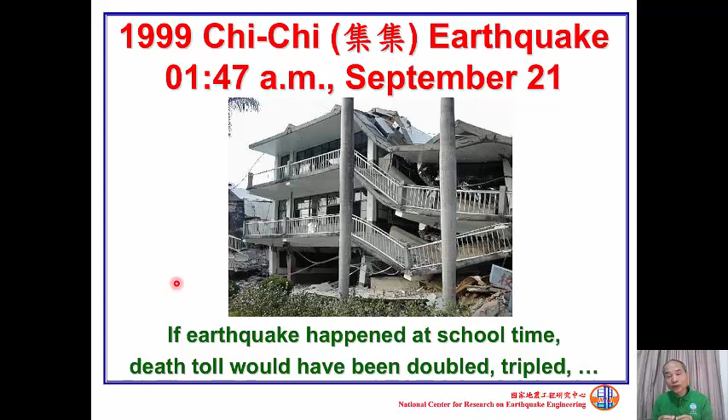This is a picture taken after the 1999 Chi-Chi earthquake. A school building completely collapsed. We were so lucky. The earthquake happened at midnight. No students were there. If the earthquake had happened during school hours, the death toll would have been double or triple. Therefore, seismic deficiency was common for school buildings in Taiwan at that time, but not now. Seismic upgrading of school buildings was a stringent issue at that time, but not now.

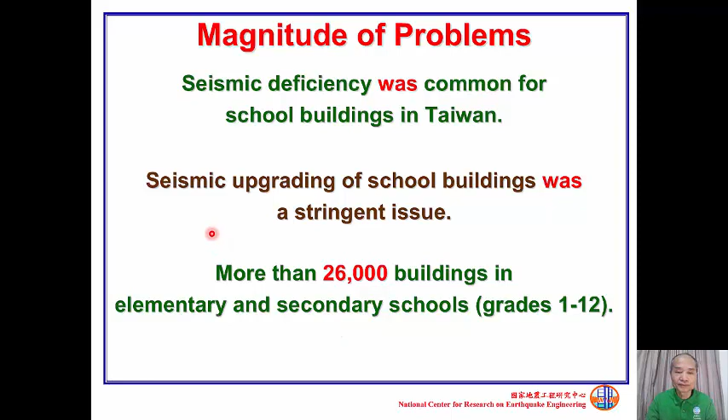When facing the problem, we would like to know the volume of the problem. There are more than 26,000 school buildings in elementary and secondary schools from grade 1 to grade 12. In collaboration with the Ministry of Education, we proposed a strategy for upgrading school buildings. There are several stages here. From the comprehensive survey, we know the total number of school buildings in Taiwan, so that we know the volume of the problem.

Buildings built after 1999 were excluded from this program because we believe their performance is much better, so the total number of school buildings involved in this program is reduced through the comprehensive survey. In the second stage, preliminary evaluation, we have the seismic index, IS, of the school building. Buildings with IS greater than 80, because the performance is okay at this moment, were excluded from the program. Therefore, the number of school buildings involved is further reduced through preliminary evaluation.

The third stage is detailed evaluation. From detailed evaluation, we have the CDR of the building. CDR is capacity to demand ratio. A building with CDR greater than 1 means that the seismic performance is okay at this moment, so they were excluded from the program. Therefore, the number of school buildings involved is further reduced through detailed evaluation. If the CDR is less than 1, the building moves to the next stage, retrofit design and retrofit construction. In the stages of detailed evaluation and retrofit design, peer review is necessary. And in the stage of construction, inspection by professional engineers is necessary.

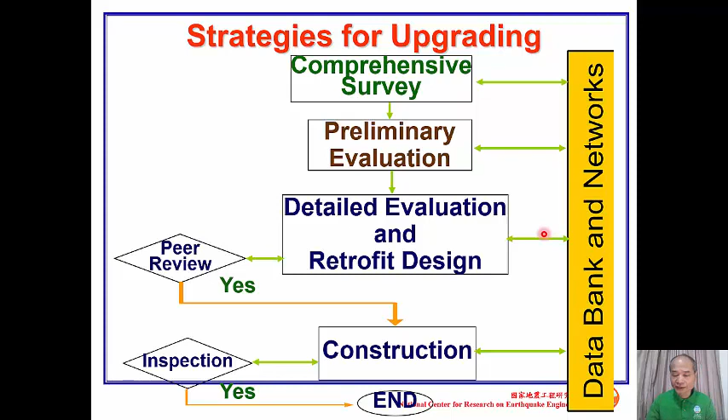The results from all the stages are submitted to a databank through the network, so that we have all the information of all buildings. From the comprehensive survey, buildings built after 1999 were excluded. From preliminary evaluation, buildings with IS greater than 80 were excluded. From detailed evaluation, buildings with CDR larger than 1 were also excluded. Therefore, big fishes were screened out through the process. Only the smallest fishes are left, so that we can handle the weakest buildings first. Through this screening process, the volume of the problem is reduced stage by stage.

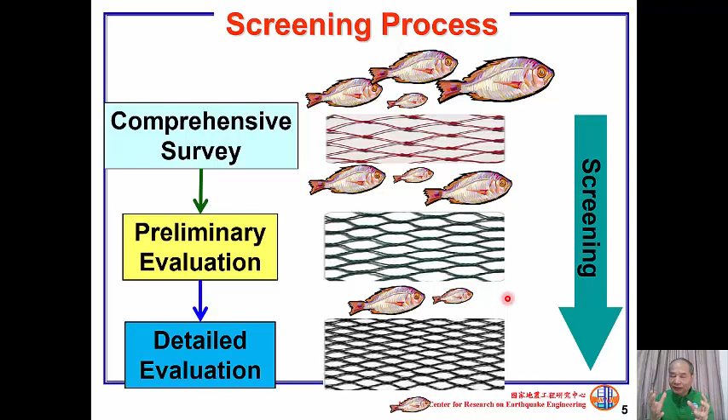Even though the technology of upgrading school buildings is ready, it's very difficult to strive for budget. In 2008, we had a great chance. In response to the 2008 financial tsunami, the government allocated 558 billion NT dollars to stimulate the economy, in which 18.3 billion New Taiwan dollars went to seismic upgrading of school buildings in elementary and secondary schools. It was expected that thousands of school buildings would go through the process of preliminary evaluation, detailed evaluation, retrofit design, and retrofit construction. 1,500 school buildings were expected to be retrofitted in 4 years.

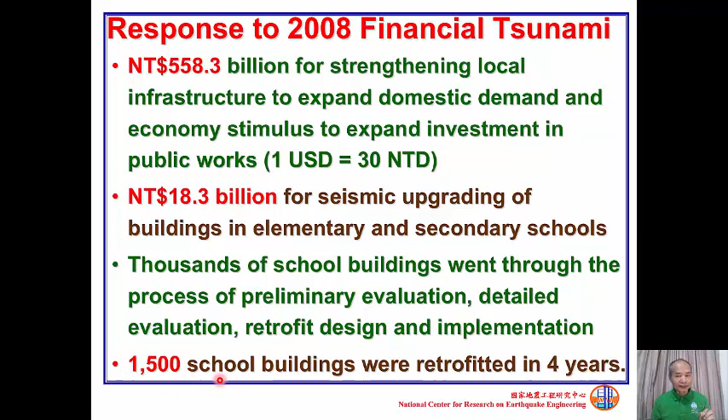In the years between 2009 and 2012, we have a budget of $19.2 billion to have 6,000 school buildings in preliminary evaluation, 3.8 thousand school buildings in detailed evaluation, 1.5 thousand for retrofit design and retrofit implementation. With a good beginning, it is half done. Therefore, more budget followed.

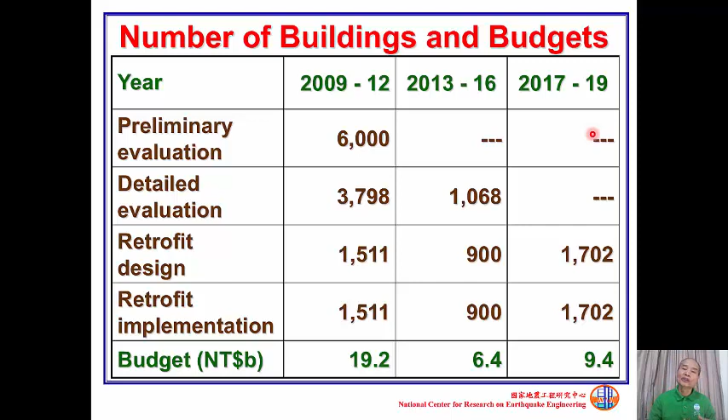In the second stage, from 2013 to 2016, we have a budget of 6.4 billion NT dollars. In the stage 2017 to 2019, we have a budget of 9.4 billion Taiwan dollars. And we hope that by 2019, all the buildings will be completed.

And is retrofit effective? In 2010, we have a verification. In 2010, there's an earthquake called the Jiaxian earthquake, just 1 year after the program was launched. There are 14 buildings in 9 schools that were damaged, and no retrofit measure had been taken at that time yet.

Is seismic retrofit effective? In 2010, we faced the Jiaxian earthquake. Among buildings without retrofit, 14 buildings in 9 schools were damaged. In 2010, the program had launched just 1 year, so a limited number of school buildings had already been retrofitted. This is one of the buildings without retrofit. It has been evaluated and was found to be insufficient in seismic performance. It is on the waiting list to be retrofitted, but by that time it had not been retrofitted yet.

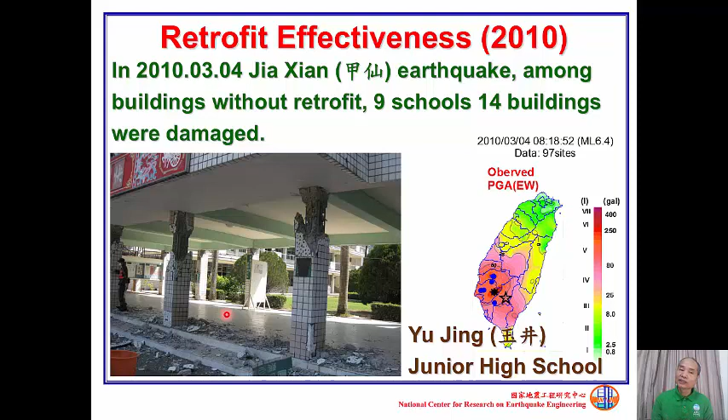About 1 kilometer away from this building, there's another school called Yujing Vocational School. This is the building, and it has already been retrofitted by reinforced concrete wall, and no damage. Therefore, among the buildings with retrofit, no damage was observed in the 2010 Jiaxian earthquake.

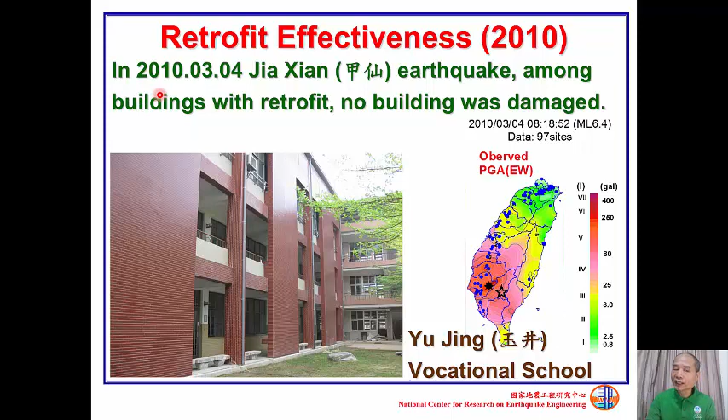In 2016, 7 years after the program was launched, there's the Meinong earthquake in Tainan City. 151 buildings evaluated to be qualified; only 1 building damaged because the ground shaking intensity is higher than the design one. 58 buildings retrofitted, and these are high-risk buildings, and no damage was observed. 85 buildings without retrofit, and these buildings are of low risk. 18 buildings damaged, but no collapse.

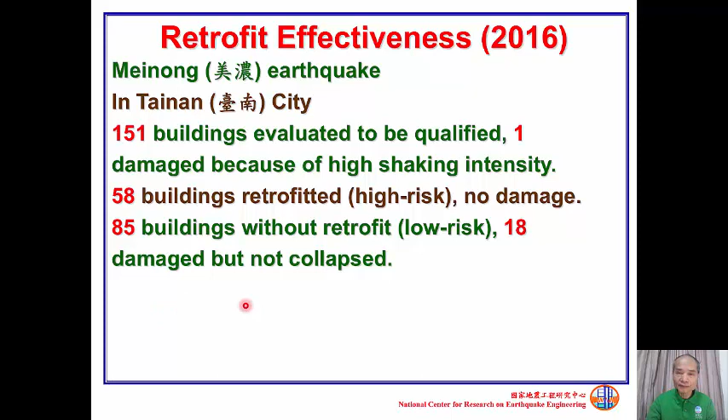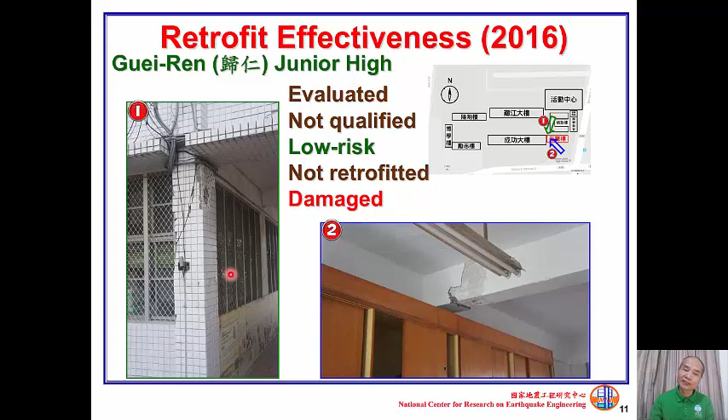Here's an example. In Guei-Ren Junior High School, there are several buildings on this campus. This is Guanghua building. It has already been evaluated to be not qualified, and it is a low-risk building, and it has not been retrofitted yet. It was damaged, but the damage is not that serious; the damage state is considered moderate. Another 2 buildings, Yangming building and Lizhi building, were evaluated not qualified and retrofitted. No damage was observed.

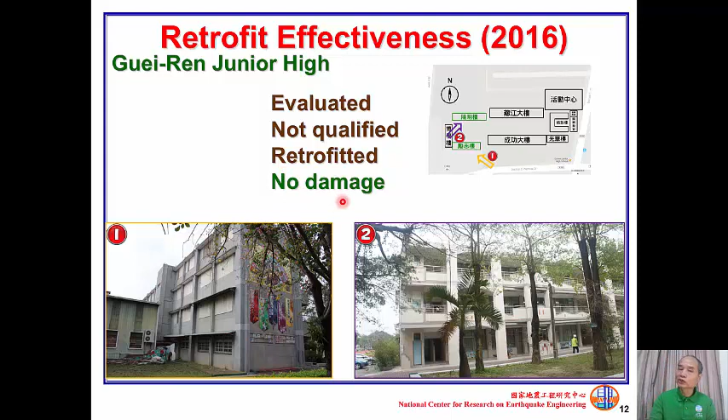There are 3 most common retrofit methods in Taiwan. One is reinforced concrete jacketing. In reinforced concrete jacketing, we make the cross-section of the column much larger. This is the column with no retrofit. This is the column with retrofit. It can be observed that the cross-section of the column with retrofit is much larger.

Another method is adding wing walls to the sides of the column along the direction we are going to upgrade. This is the column with no retrofit. This is the column with retrofit by adding 2 wing walls to both sides of the column.

The third method is adding shear wall. This is the frame, the span with no retrofit. And this is the frame with retrofit. Originally, this frame is similar to the one next to it, and the window is removed and shear wall is infilled into the beam-column frame. The common characteristic of these 3 methods is to make the vertical members stronger and bigger so that the school building can be prevented from collapsing.

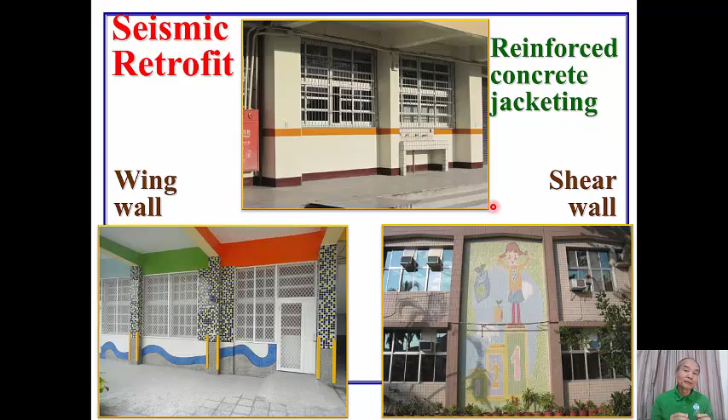This is the first stage, comprehensive survey. It was conducted by students of civil engineering. It cost millions of Taiwan dollars. And from the comprehensive survey, we know the total number of school buildings in Taiwan, so that we have some idea about the volume of the problem.

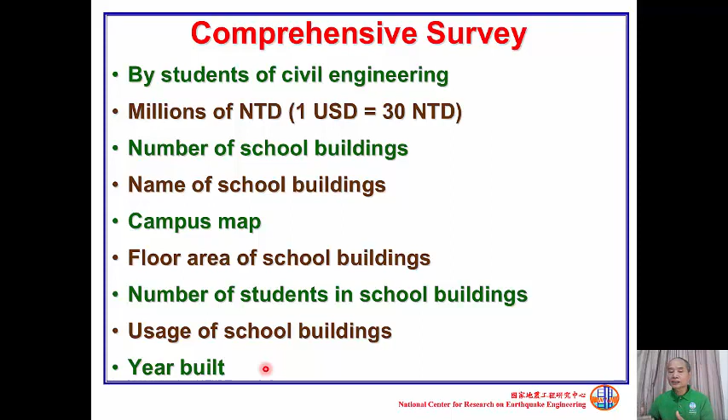And also some information was gathered, including name of school buildings, campus map, floor areas of school buildings, which is important to propose the budget, and number of students in the school building, usage of the school building. If a school building is not used by students, it will be excluded from this program at this moment. And year built: if a building was built after 1999, it will be excluded from this program.

From the comprehensive survey, we know that the total number of school buildings is 26.6 thousand school buildings in Taiwan. And among them, 10,000 school buildings, that's 37.5% of the total, were excluded because they were built after 1999. And we believe that for buildings built after 1999, the performance will be better than the ones built before 1999. Therefore, at this moment, buildings built after 1999 were excluded from the program.

16.6 thousand school buildings, that's 62.5% of the total, move to the next stage, preliminary evaluation. Therefore, from the comprehensive survey, the number of school buildings remaining in this program was reduced from 26.6 thousand to 16.6 thousand.

The second stage is preliminary evaluation. It is conducted by professional engineers according to the comprehensive survey. Only buildings built before 1999 enter into this stage. It takes half a day for a building, and it costs NT$6,000 for a building. And from preliminary evaluation, we know the seismic index, IS, of the building. If IS is greater than 80, it is excluded from the program. And the results from preliminary evaluation were submitted through the internet to NCREE, our center.

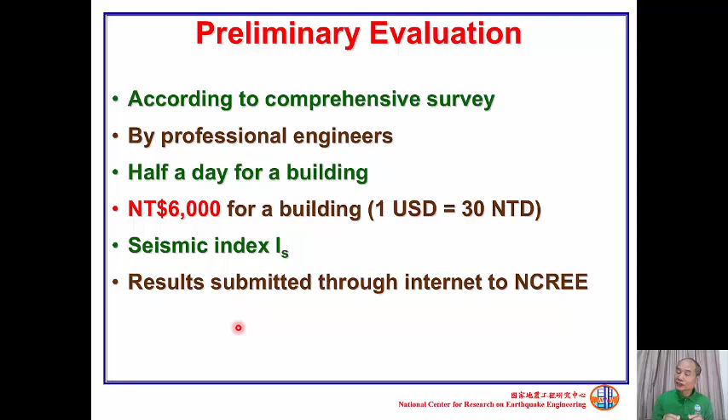The concept of preliminary evaluation is very simple. It's just a ratio of capacity to demand. To compute the capacity of a building, we have to know AC. AC is the cross-sectional area of the columns in the first floor, and AW. AW is the cross-sectional area of the walls in the direction we are interested. And tau C is the lateral strength per unit cross-sectional area of columns. And tau W is the lateral strength per unit cross-sectional area of walls. Tau C and tau W were prepared by NCREE, our center.

And in order to have the demand, we have to know AG. AG is the design peak ground acceleration. It can be looked up from the seismic design code. Summation AF is the total floor area above the first floor. In this case, it is the floor area of the second floor, third floor, and the roof. And W is the structural weight per unit floor area. It is prepared by NCREE.

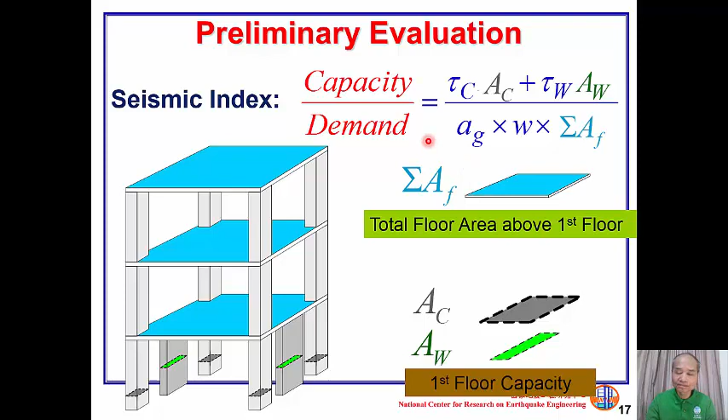Okay, from preliminary evaluation, so far 6.6 thousand school buildings were qualified. It counts 24% of the total. And 10,000 school buildings, 37.8% of the total, were not qualified and have to move to the next stage, detailed evaluation. And a very small amount of buildings are still under processing. Therefore, after preliminary evaluation, the total number of school buildings remaining in this program has been decreased from 26.6 thousand to 10,000.

The third stage, detailed evaluation, is conducted by professional engineers. According to the result from preliminary evaluation, only buildings with IS less than 80 will enter into this stage. It takes 45 to 60 days for a building, and it costs on average about $400,000 a building. And the cost for detailed evaluation is counted by floor area. Therefore, the unit cost is $200 per square meter of floor area.

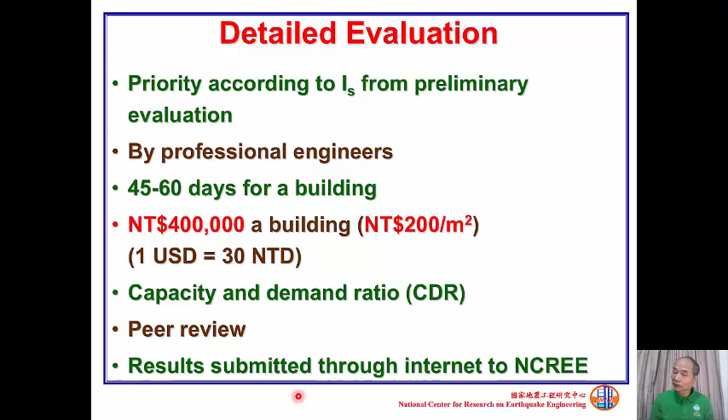And the result of detailed evaluation is the capacity to demand ratio, CDR. If CDR is larger than 1, that means the seismic performance is okay at this moment. They will be excluded from the program. And peer review is necessary in detailed evaluation. And the results of the detailed evaluation need to be submitted through the internet to NCREE.

In detailed evaluation, pushover analysis is conducted. And the result of pushover analysis is in the form of a capacity curve or pushover curve, which is the relationship between base shear and roof displacement. And the capacity curve can be transformed into a capacity spectrum, which is the relationship between spectral acceleration and spectral displacement.

And the design response spectrum is adjusted so that the two spectra intersect at the performance point, and the performance point is selected according to how much displacement is tolerable. If only small displacement is tolerable, the spectral displacement will be less. If more displacement is tolerable, the spectral displacement can be larger.

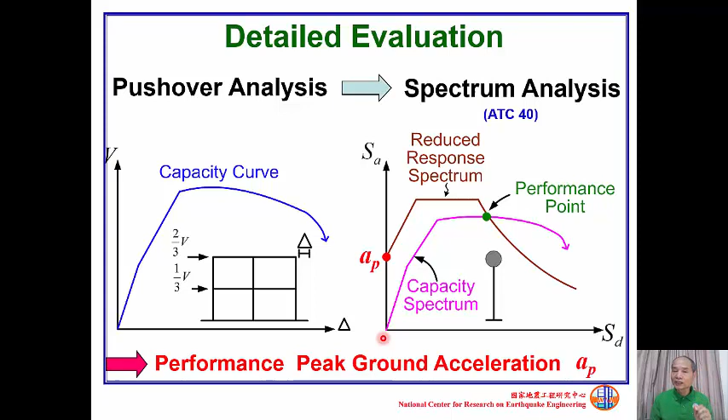And from the reduced response spectrum, we have AP, and AP is the performance peak ground acceleration, which is the capacity of the structure. And the capacity of the structure is compared with the demand, and the demand is the design peak ground acceleration, so that we have CDR, capacity to demand ratio.

So far from detailed evaluation, 1.2 thousand school buildings were qualified. 8.8 thousand school buildings, it counts 33.1% of the total, were not qualified and moved to the next stage, retrofit design. 37 school buildings, about 0.1% of the total, are still under processing.

Therefore, after detailed evaluation, the third stage of the program, the total number of the school buildings involved remaining in this program has been reduced from 26.6 thousand to 8.8 thousand. Therefore, the volume of the problem has been gradually reduced.

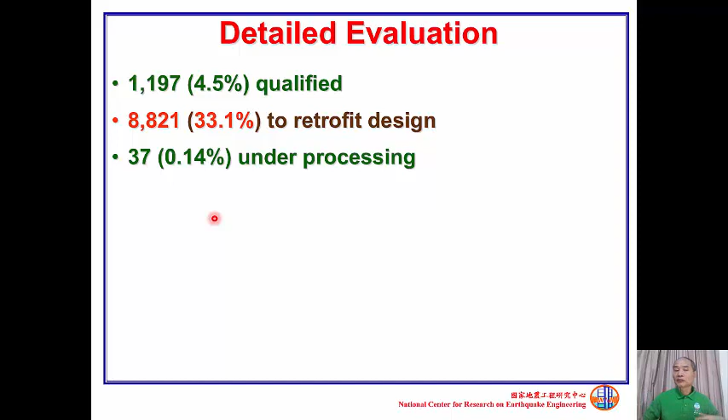And then the fourth stage, retrofit design, is conducted by professional engineers, and the priority is according to the capacity and demand ratio from detailed evaluation. That means that the lower the CDR, the higher the probability, the higher the priority to enter into this stage.

It takes 45 to 60 days for a building, and it costs on average $300,000 a building. And the cost is counted by floor area. Therefore, the unit cost is about $150 per square meter of floor area.

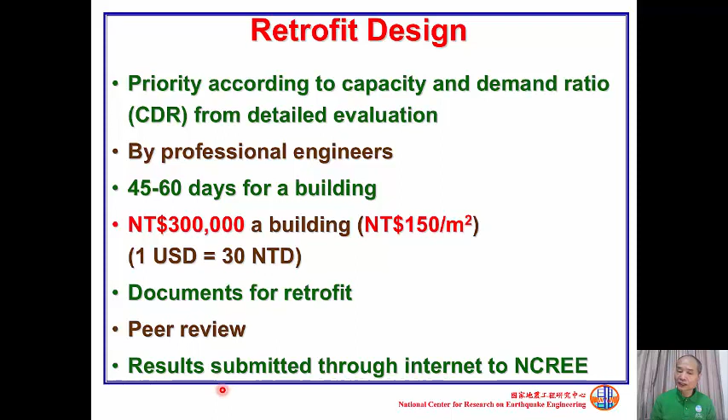And for the result of retrofit design, the professional engineer should provide all the documents for retrofit, including design drawing, and peer review is necessary. And the result from retrofit design has to be submitted through the internet to NCREE.

So far, 199 school buildings were qualified in the stage retrofit design. Since some of the school buildings were evaluated before the program was launched, in retrofit design the building will be required to perform seismic evaluation again. Therefore, about 200, not that many, school buildings were qualified in the stage retrofit design.

8.5 thousand school buildings were not qualified. It counts 31.8% of the total. They have to move to retrofit implementation. 151 school buildings, not that many school buildings, are still under processing.

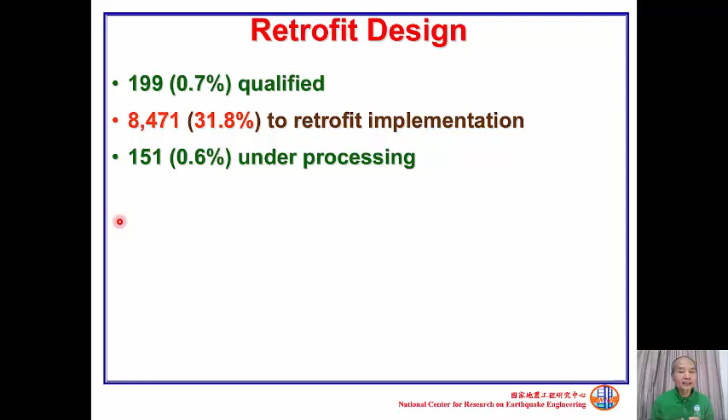It costs, on average, $6.3 million a building, and the cost is counted by floor area, and the unit cost is $3.1 thousand per square meter of floor area. In the budget for retrofitting of a school building, at least 70% are used for retrofit of the structure. At most, 30% are used for restoration, including painting or leakage repair.

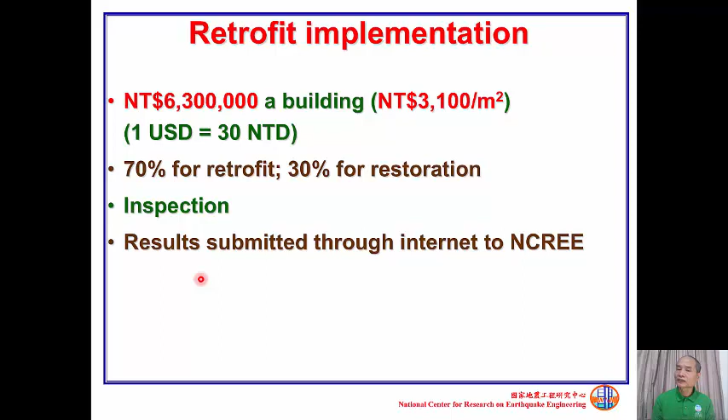And inspection is necessary. Therefore, retrofit implementation is watched by professional engineers, and the results were submitted through internet to NCREE. So far, 6.5 thousand school buildings, it counts 24.6%, were completed, in which 4.7 thousand school buildings were retrofitted, 1.8 thousand school buildings rebuilt, and 1.9 thousand school buildings, it counts 7.2% of the total, are still under processing. And it is expected that by 2019, all the buildings will be completed.

And peer review. In detailed evaluation and retrofit design, peer review is necessary. And we believe that with detailed evaluation and retrofit design watched by the third party, the quality of the work may be better. And we have a reviewer bank with 40% university professors and 60% professional engineers. And a review committee consists of 3 members, at least 1 university professor and at least 1 professional engineer, and the third member may be a university professor or professional engineer, so that we have the balance between theory and practice.

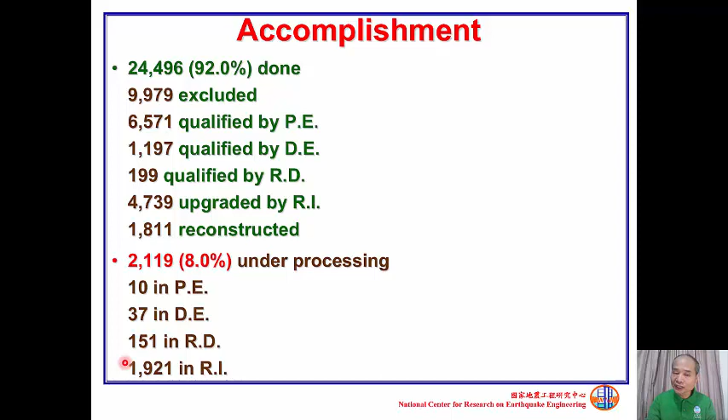199 school buildings were qualified by retrofit design with CDR larger than 1. 4,700 school buildings were upgraded by retrofit implementation or retrofit construction. 1,800 school buildings were reconstructed. So far, there are still 2,100 school buildings under processing, in which 10 school buildings are in preliminary evaluation, 37 school buildings in the stage of detailed evaluation, 151 school buildings in the stage of retrofit design, and 1.9 thousand school buildings in the stage of retrofit implementation.